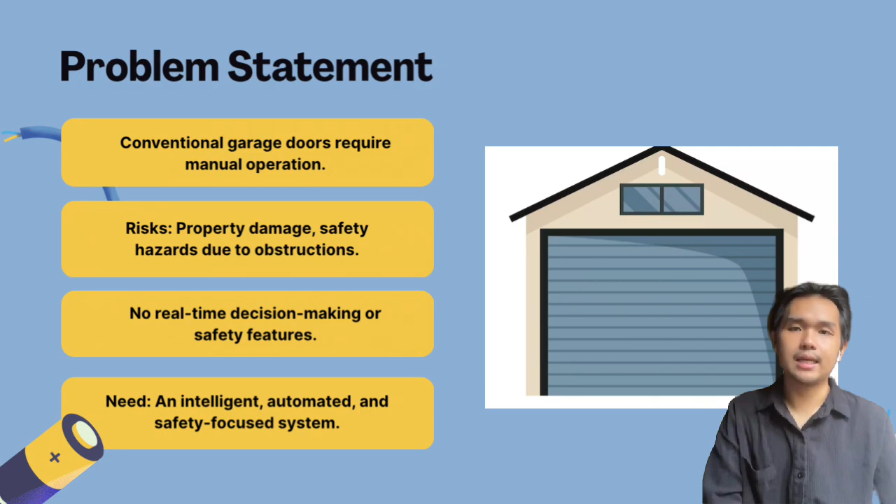Our project focuses on achieving two key objectives. First, we aim to design an automated garage door system that incorporates safety sensors like infrared and strain gauge sensors. This will detect obstacles and prevent accidents during operation. Second, we will implement PLC-based control logic to automate the door movement.

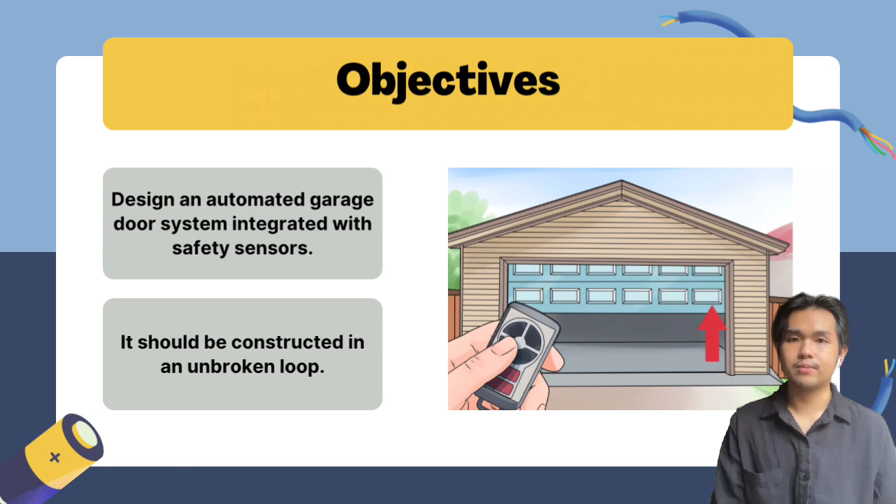The PLC will process real-time data from the sensors and ensure precise and safe operation. With this objective, we are developing smarter, safer, and more reliable garage door systems that enhance user convenience.

The system will utilize infrared sensors for object detection and strain gauge sensors to detect resistance during door movement, preventing accidental collisions. The safety mechanism will be programmed to stop or reverse the door movement when obstructions are detected.

Next, the control logic for the system will be developed using a PLC. The logic is designed to process real-time sensor input and control the motorized movement of the garage door accordingly. Moreover, a ladder diagram will be created and simulated using PLC Fiddle, an online PLC simulation tool. So the project will focus on the control and automation aspects, including sensor integration, ladder logic programming, and also functioning testing through simulations.

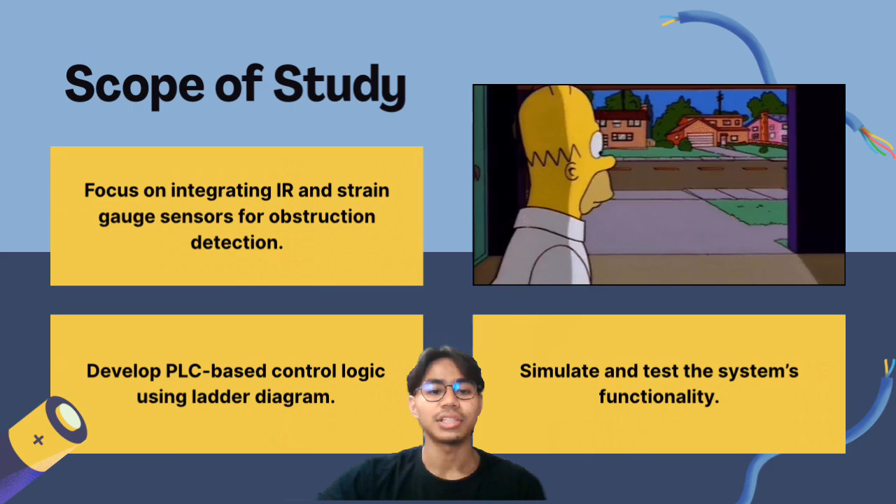There were many existing garage doors that have been equipped with automatic features. The first example is an automated garage door using infrared sensor and Arduino. This system offers two methods of operation: remote control access using a series of button presses, and automatic trigger using a vehicle-mounted IR transmitter.

The second example is equipped with Bluetooth sensors and a mobile-based control interface. The system allows automatic activation when the user's phone comes within proximity, signaling the Bluetooth module to trigger door movement.

Third, integration of IoT into garage systems. The system supports voice commands through Google Assistant. Additionally, they implement real-time notifications and user authentication, which ensures that only authorized individuals can control the system.

PLCs play a fundamental role in industrial automation by offering a reliable and efficient means of controlling equipment and processes. It was originally developed in the late 1960s as a replacement for hardwired relay systems, and today they are integral components of modern industrial and control systems.

The International Electrotechnical Commission, IEC, established IEC 61131-3, which standardized five primary PLC programming languages: ladder diagram, function block diagram, structured text, instruction list, and sequential function chart. Among all, ladder diagram is the most widely used because it closely resembles electrical relay logic.

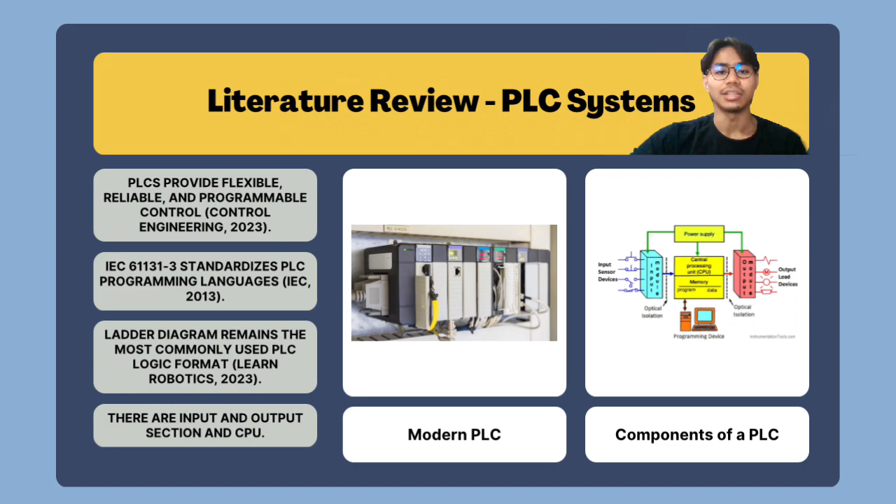Active infrared sensors emit their own IR signal and detect reflections, often used for proximity and obstacle detection, while passive IR sensors, or PIR, detect thermal radiations, commonly applied in security and automation systems. They are popular due to their low cost, compact size, and non-contact operation.

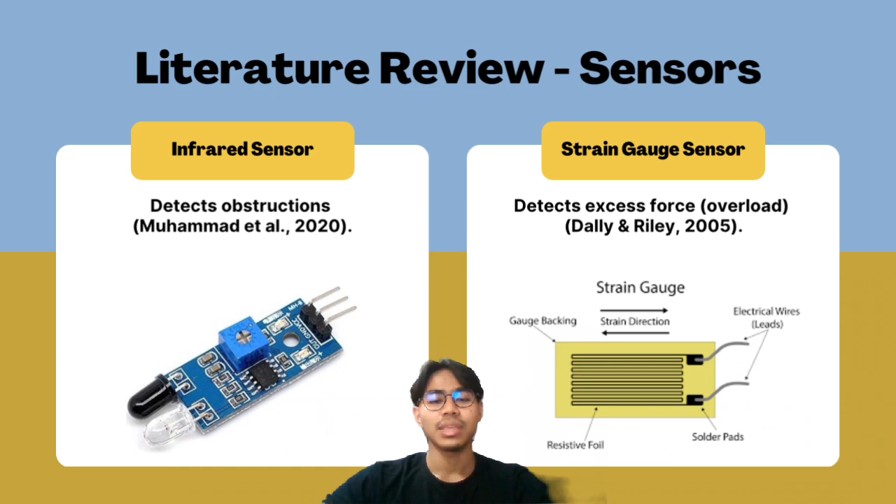Meanwhile, strain gauges measure the strain or deformation of a material when subjected to force. The working principle is based on the change in electrical resistance of the gauge as it is stretched or compressed. This change is proportional to the amount of strain, allowing for accurate stress analysis.

Next, we continue with the methodology for the system components. So we have three devices: the input devices, output devices, and the processing unit. For the input devices, first we go to the open or close button.

Its function is to initiate the door opening or closing sequence. Next, for the stop button, it acts as an emergency stop function, if any emergency happens.

The next one is the optical encoder, which is one of the sensors being used. It acts as a fully open or fully closed switch, determining whether the garage door has been fully opened or fully closed. For this optical encoder, we will use the incremental encoder. We also use the strain gauge sensor that will act as the overload sensor. It will detect overstrain or obstruction during closing or opening of the door.

The next one is the infrared sensor. It will act as a safety sensor, detecting any obstruction that comes between the garage door and the floor during closing, then sending a signal to reopen it. We continue with the output devices.

The first one is the motor, which will open or close the garage door. The LED indicator will give the signal of whether the garage door is opening or closing. There's also the overload LED light that will signal if the garage door is overstrained or if there is any obstruction.

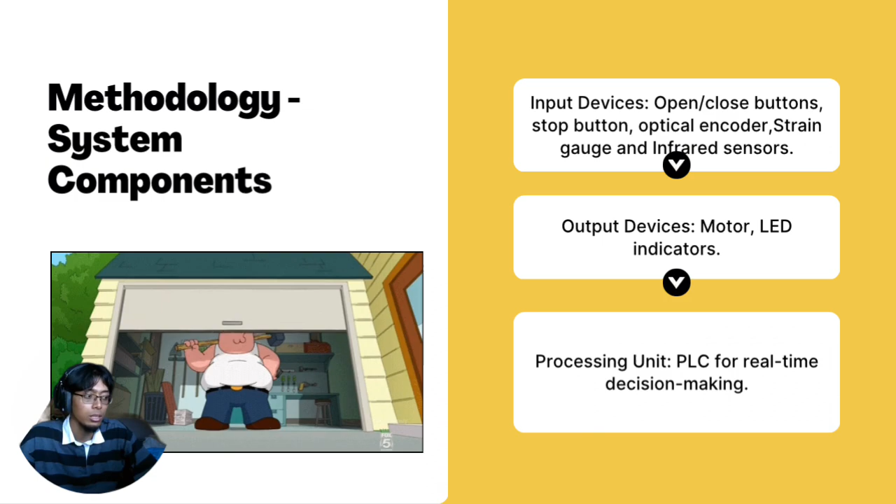The last one is the processing unit. We'll be using the PLC because it is more suitable for this situation. The next part for the methodology is the logic formulation, which tells about how the system works logically.

When the open button is pushed, the open light will turn on, and it will start the delay opening timer, then the motor will run to open the garage door. When the door is fully open, the optical encoder will detect the full open position, the motor will stop, and the open light will turn off.

When the close button is pushed, the close light turns on, and the delay closing timer will start, then the motor will run to close the garage door. When the garage door is fully closed, the optical encoder will detect that it is in the full closed position, the motor will stop, and the close light will turn off.

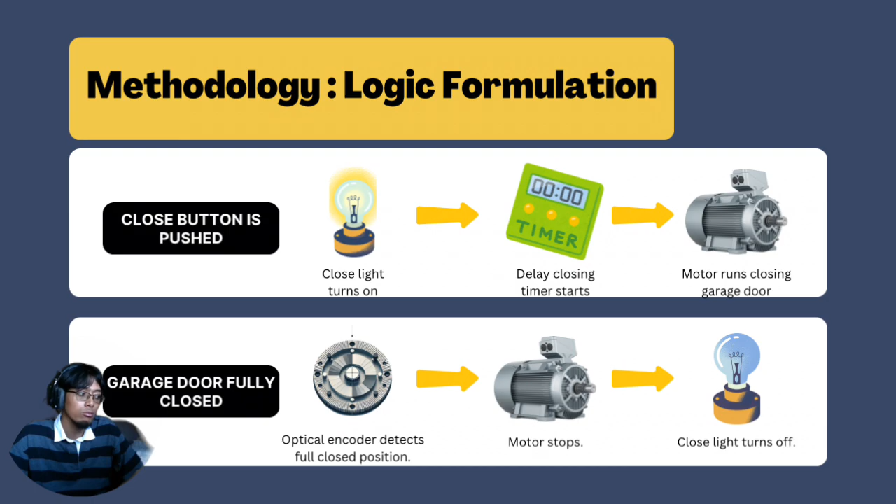By using the optical encoder, we get a precise garage door position, whether it is fully closed or fully open. We'll utilize values like 0 equals garage door at fully closed, and 50 equals garage door at fully open.

Next, for the safety features, we have the infrared sensor. When an obstruction happens, the infrared sensor will detect the obstruction under the garage door when closing, and it will stop the motor and reopen the garage door.

The next one is the strain gauge sensor. It will detect when overload happens, detecting strain due to obstruction or overstrain, and it will stop the motor and turn on the overload light. Then the user needs to push the open button to continue opening, or push the close button to continue closing.

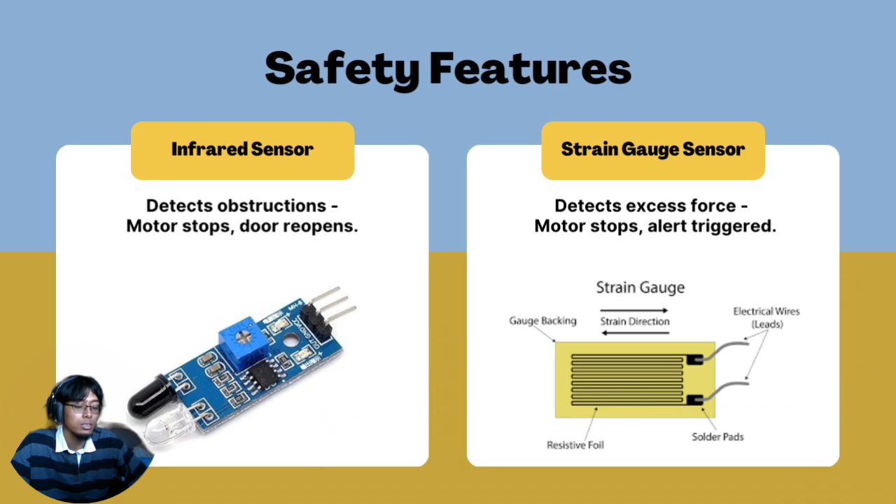It's a little bit different: the infrared sensor will return the door to the open position, but the strain gauge sensor will just stop the garage door. So this is the system design, and besides it, we have the flowchart for opening the door.

The system will start when the open button is pushed. The open light will turn on, the delay opening timer will be activated, maybe 10 seconds or 5 seconds after we push the open button, then the motor will start to run to open the garage door, and the strain gauge will start functioning.

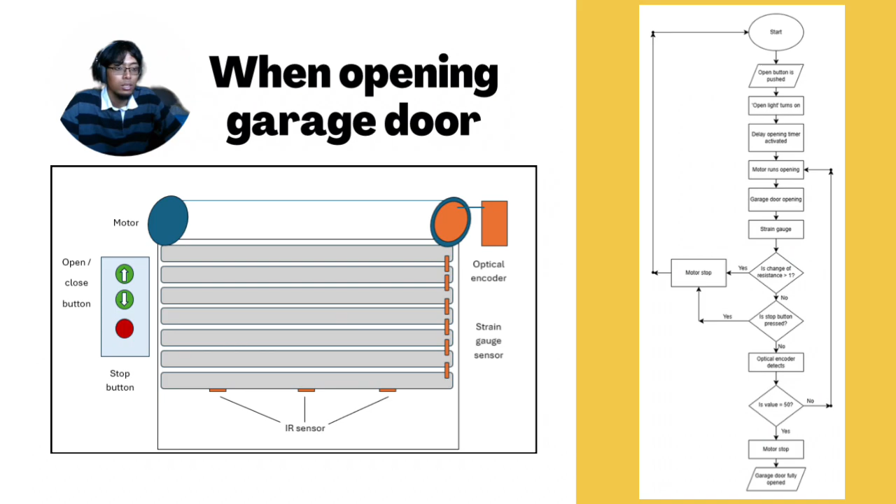The strain gauge will detect if there is any change of resistance, such as overstrain from something stuck between the motor or similar. If there is no change of resistance, the system continues, checking whether the stop button is being pressed. If the stop button is not pressed, it continues to the optical encoder.

The optical encoder will detect whether the value has reached 50 or not. If it has not yet reached 50, it will return to the front and restart the loop, with the motor continuing to run, looping until the value reaches 50. After the value equals 50, the motor will stop, and this indicates the garage door is fully open.

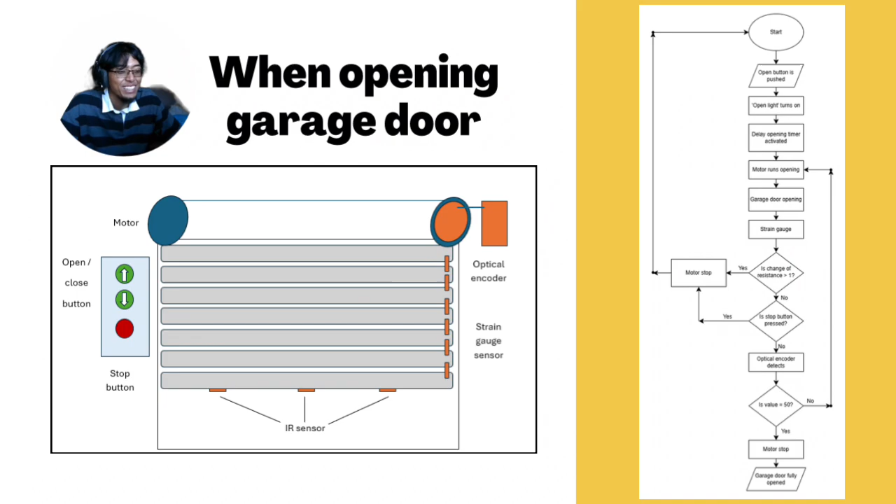So when the garage door is closing, it will start with the close button being pushed. The close light will turn on and the delay closing timer will be activated. Then the motor will run to close the garage door, and the IR sensor will start functioning, detecting if there is any obstruction. If there is obstruction, the motor will run to reopen the garage door. But if there is no obstruction, it will continue the system.

The next one is the strain gauge. It will detect if there is any change of resistance, meaning if there is anything stuck, overstrain, or overload. If there is no issue, it will continue and check if the stop button is being pressed. If not, it will continue with the optical encoder, which detects if the value is equal to zero. If it is still not equal to zero, it means the garage door is not fully closed yet, so it will continue the loop until the value reaches zero. Once it reaches zero, the motor will stop, indicating the garage door is fully closed.

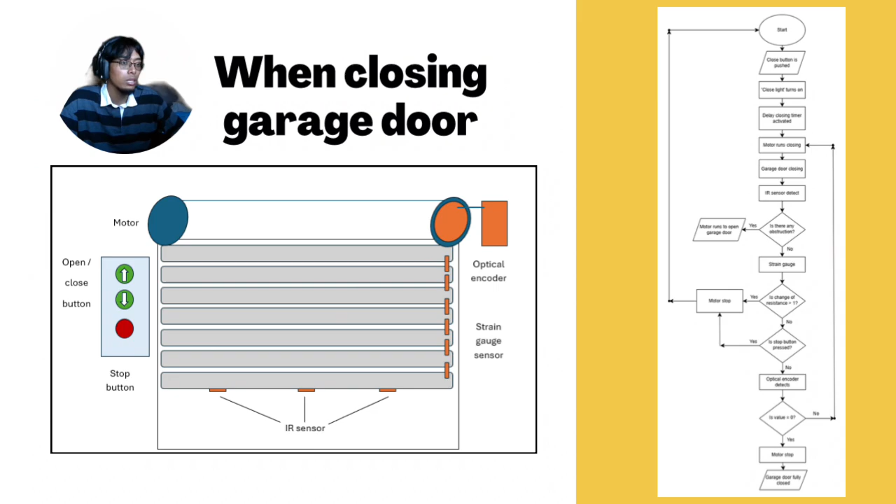Now let's move on to the result and discussion for our ladder diagram. This ladder diagram represents the core logic behind the control system of our project. It was developed using PLC programming to ensure both functionality and safety. There are two key highlights to emphasize here.

The first one is logical control. This refers to how the system defines specific conditions for motor operation, safety interlocks, and user input. For instance, the motor will only operate when the correct button is pressed and all safety sensors are in the appropriate state. This prevents the system from functioning under unsafe or undesired conditions.

Second is real-time decision making. This means the PLC responds instantly to sensor inputs. For example, if an obstruction is detected or the overload protection is triggered, the system immediately halts the operation. Such quick responses are essential to avoid accidents and prevent system damage.

Now, if we look at the ladder diagram on the right, we can observe how each rung represents specific conditions for different actions. The first rung introduces a delay before opening the door. It checks if the stop button is not pressed, the door is not fully open, and there are no overloads. Once these conditions are met, it activates the open delay. This is followed by the third rung, which activates the motor to open the garage door.

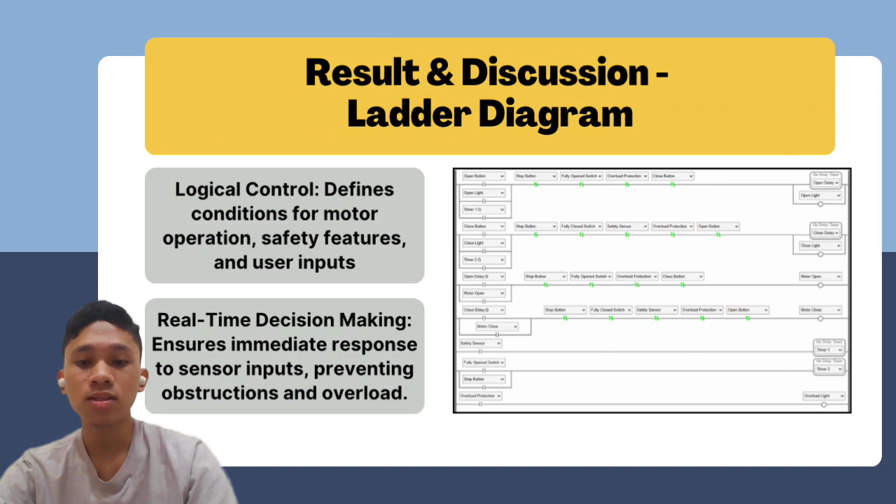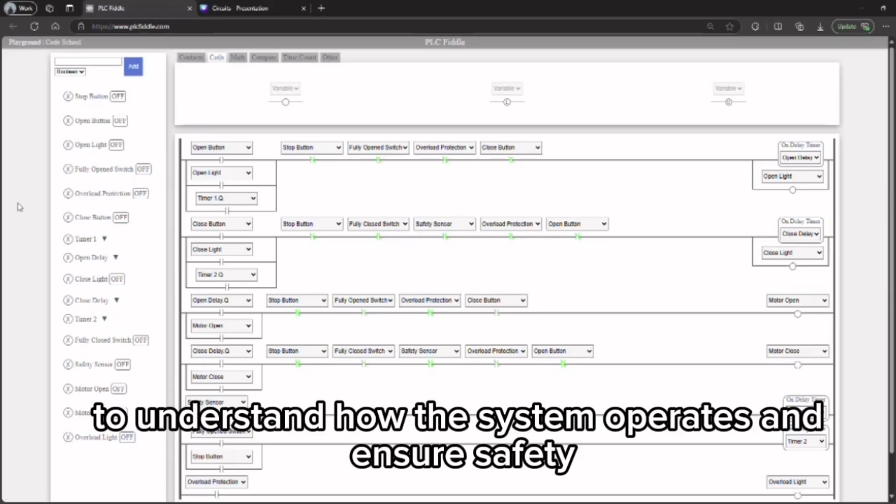Hello and welcome. So now we will demonstrate the PLC circuit for automatic garage door. In this demonstration, we will showcase the working of an automatic garage door control system using a PLC circuit. We will go through 5 key scenarios to understand how the system operates and ensure safety.

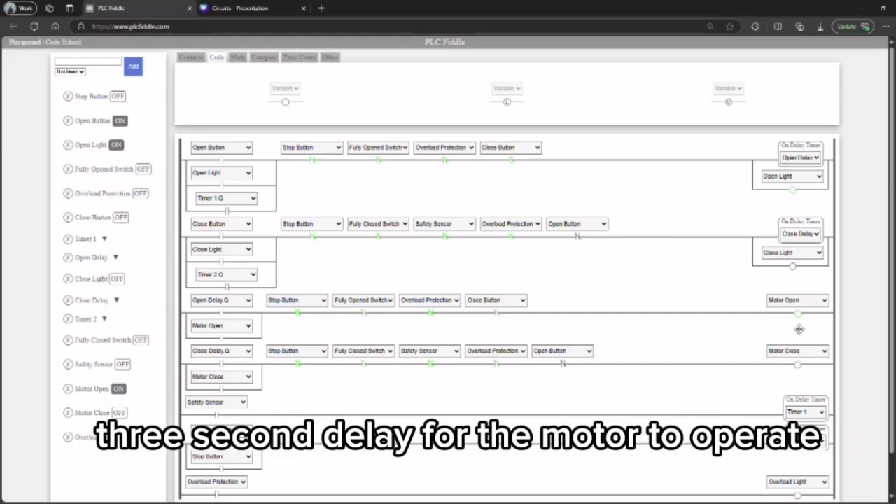So for scenario 1, let's begin with the normal door opening sequence. When I press the open button, the open light will turn on, and then there is a 3-second delay for the motor to operate, and then it will start moving the door upwards. This timer is to ensure that the door operates with precision and avoids abrupt movement.

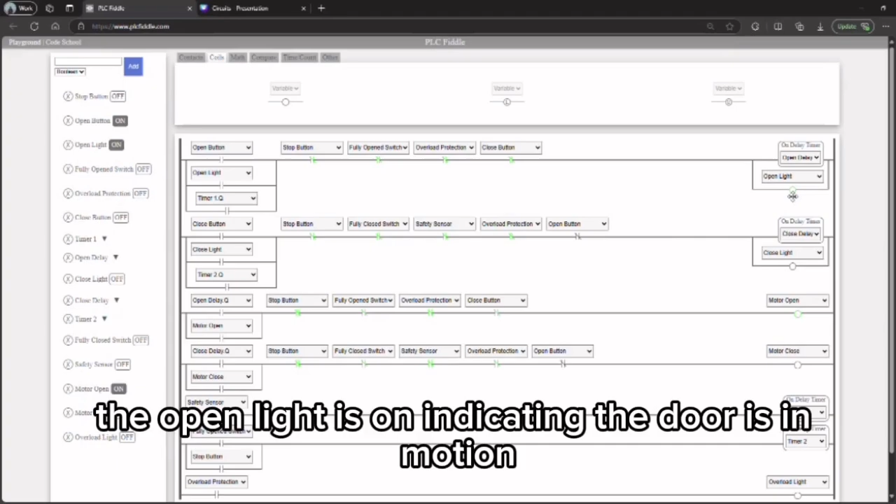As we can see, the open light is on, indicating the door is in motion. The motor remains active until the door reaches its fully open position. Now that it has reached its fully open position, the motor stops and the system is ready for the next operation.

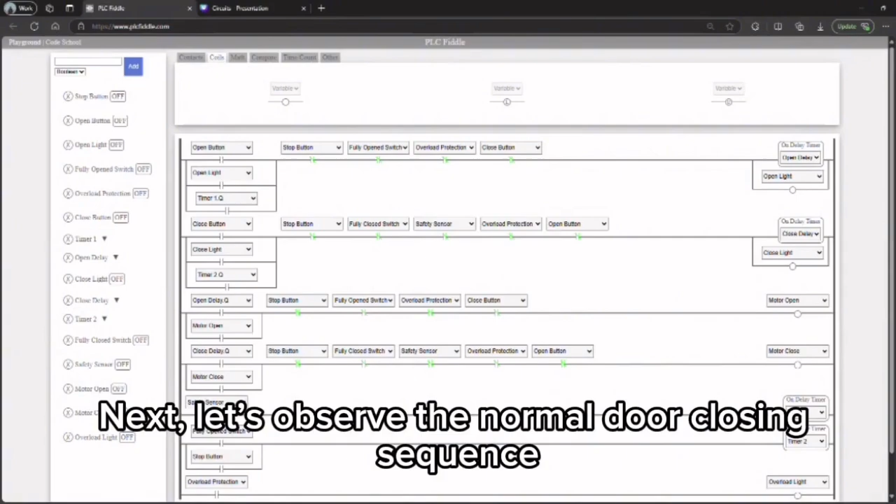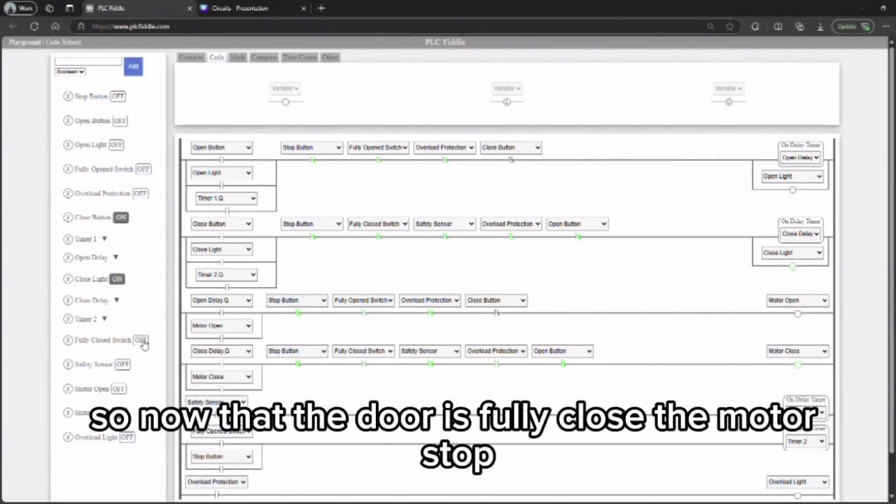Next, let's observe the normal door closing sequence. So when I press the close button, the close light will turn on, and after the 3-second delay, the door will start moving downward. So the close light is on, indicating that the door is closing. The system will continue moving until it reaches its fully closed position. So now that the door is fully closed, the motor stops, completing the cycle.

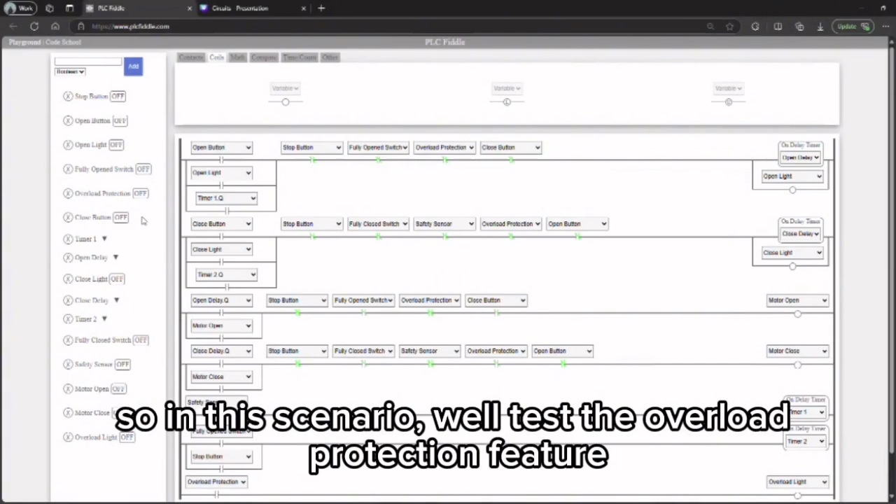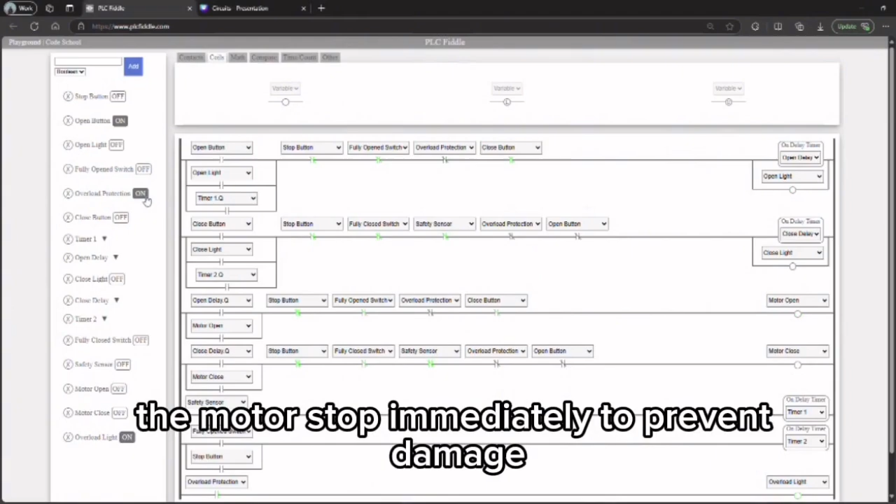So as soon as the system detects the overload, the motor stops immediately to prevent damage to the motor, and the overload light is turned on, signaling a fault. So in this state, the system does not respond to command until the overload condition is clear.

Next, so now let's test the safety sensor features. So imagine there is an object in the path where the door is closing. So we turn on the close button. Wait until it turns on.

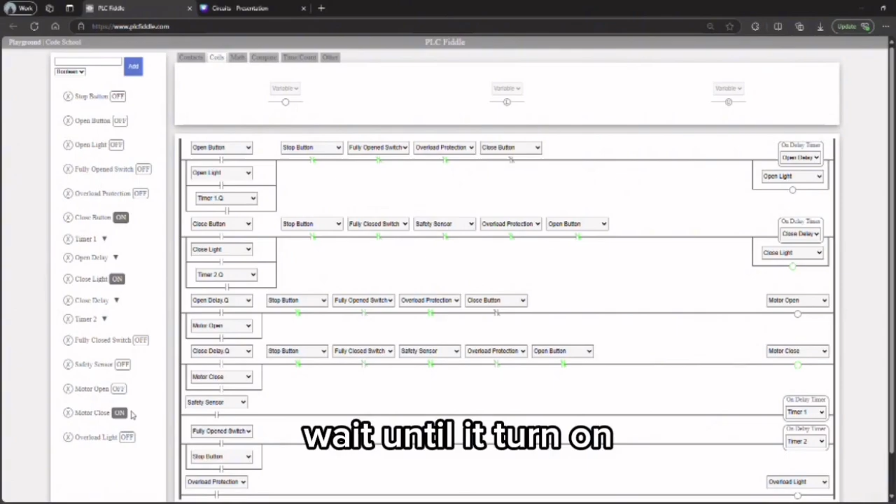Okay. So the moment the safety sensor detects an obstruction, the system stops the motor and automatically reverses the door back to the open position. So the door will remain open until the obstruction is removed, and the user manually restarts the closing process.

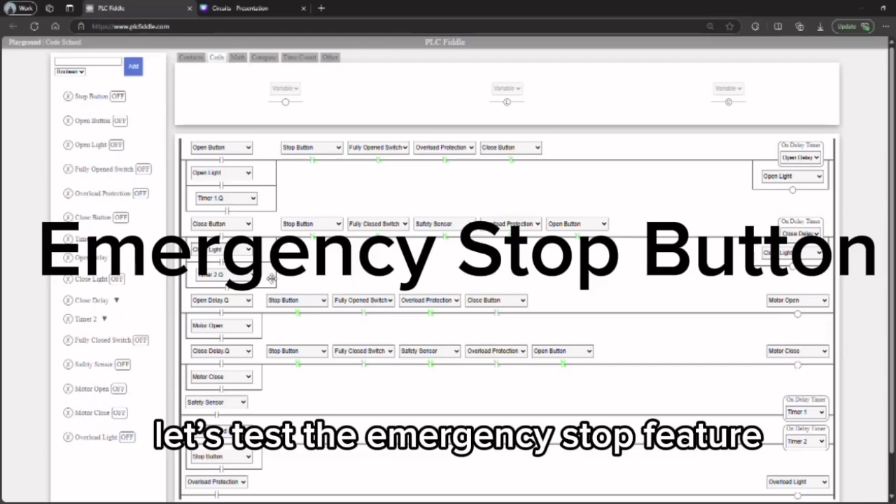Alright. So last but not least, let's test the emergency stop feature. So if at any time an operator needs to stop the door immediately in case of emergency, they can press the stop button. So the stop button, boom, it will immediately stop. As you can see, the motor stops instantly and the door remains at its current position. So the system is now idle until further action is taken.

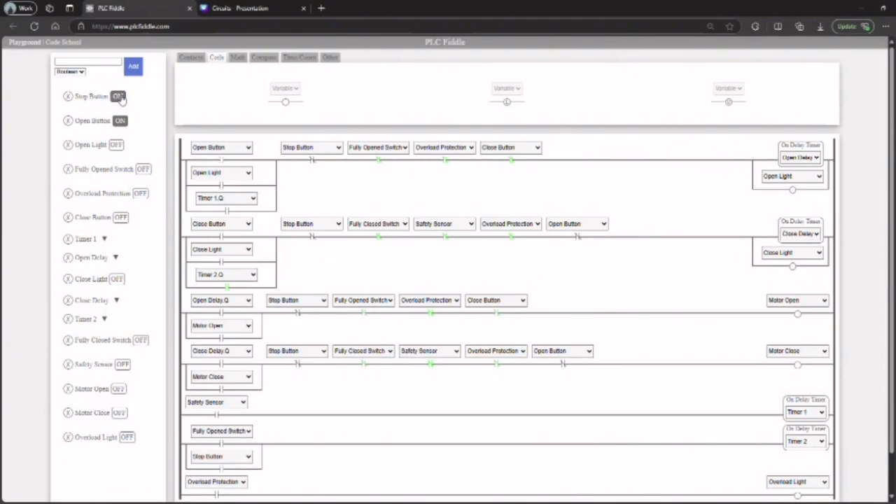So that concludes our demonstration of the automatic garage door control system using a PLC circuit. Based on the demonstration presented by Faiz, there are 4 key points we can highlight in our discussion. First, the PLC ladder logic we implemented successfully controls the entire operation of the garage door. It accurately processes inputs from sensors and user buttons to execute smooth and reliable opening and closing actions.

Second, we integrated infrared and strain gauge sensors to enhance operational safety. These sensors detect any obstruction or excessive force during movement, allowing the system to respond immediately and prevent potential accidents. Third, we tested the emergency stop function, which worked efficiently. When triggered either manually by the user or due to system fault, the motion stopped instantly, adding a vital safety layer to the system.

Finally, we added LED indicators to provide real-time system feedback. These indicators display the current status of the garage door, whether it's opening, closing, idle, or in error, offering users a clear and immediate understanding of what the system is doing. In conclusion, the demonstration showed that our system performs reliably in terms of control, safety, and user feedback, meeting all intended functionality.

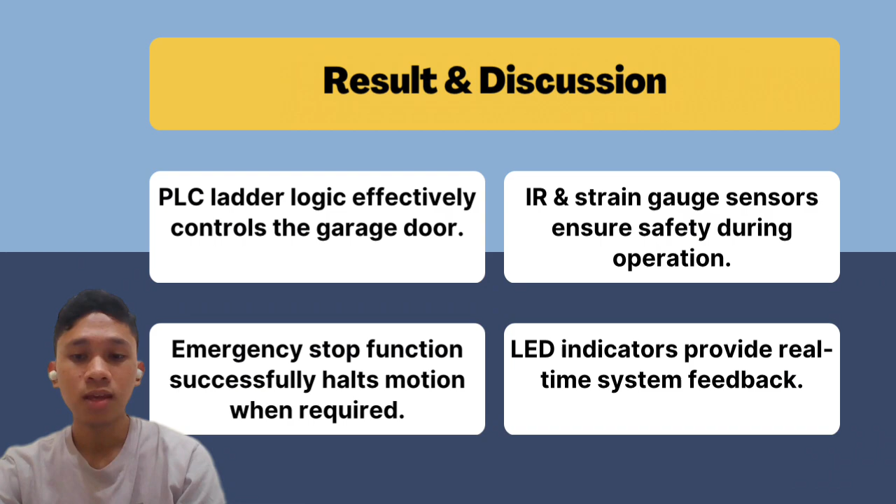Through this project, we successfully integrated PLC-based automation with safety sensors to create an intelligent garage door system. By utilizing real-time sensor feedback, our system ensures smooth and efficient operation while prioritizing safety. The inclusion of infrared and strain gauge sensors allows the system to detect obstruction, preventing accidents and damage. This makes the garage door more reliable and user-friendly. Moving forward, this system has the potential for real-world implementation with further improvement in automation, connectivity, and energy efficiency.

Thus, to enhance the system further, we propose 3 key improvements. First, smart control and monitoring. Integrating IoT technology will allow users to control and monitor the garage door remotely via a mobile app or voice assistants like Alexa or Google Assistant. Second, improve safety and efficiency. Adding more advanced sensors such as ultrasonic or camera-based detection can enhance obstacle detection. Additionally, using energy-efficient motors can reduce power consumption.

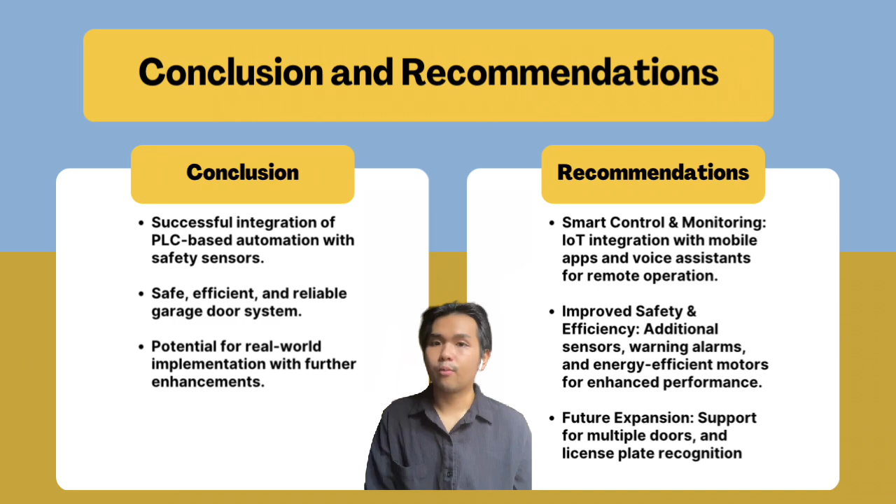Finally, future expansion. Our system can be extended to support multiple garage doors and license plate recognition. With this enhancement, the system can become smarter, safer, and more efficient, ensuring long-term reliability and convenience for users. This concludes our video on the automated garage door control with safety sensors. Through this project, we have demonstrated how PLC-based automation and safety sensors can enhance efficiency, reliability, and security.